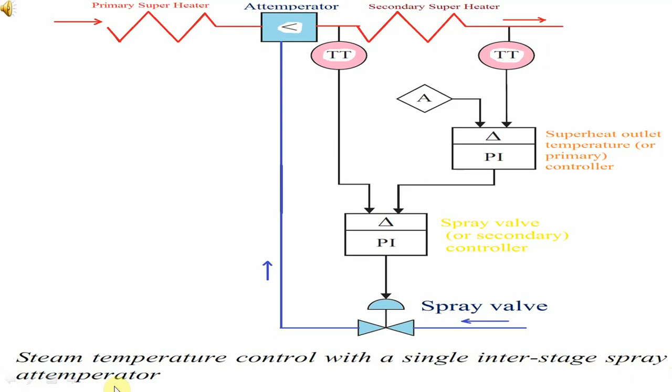TT stands for temperature transmitter. Since the temperature is measured in between the two stages of superheaters, the name of the control scheme is steam temperature control with a single inter-stage spray attemperator.

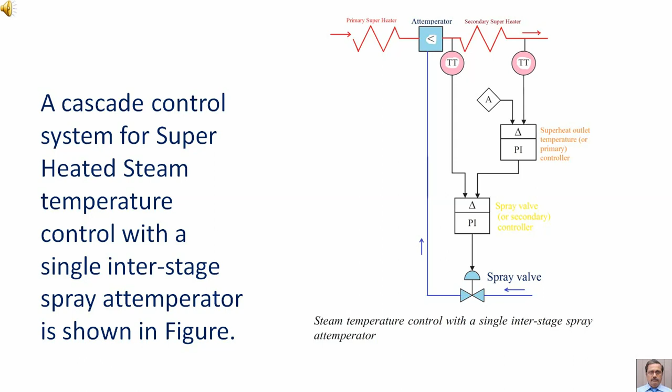A cascade control system for superheated steam temperature control with a single inter-stage spray attemperator is shown in the figure. Since the temperature of the steam leaving the secondary superheater is important, this parameter is measured and a corresponding signal is fed to a 2 or 3 term controller, proportional plus integral or proportional plus integral plus derivative.

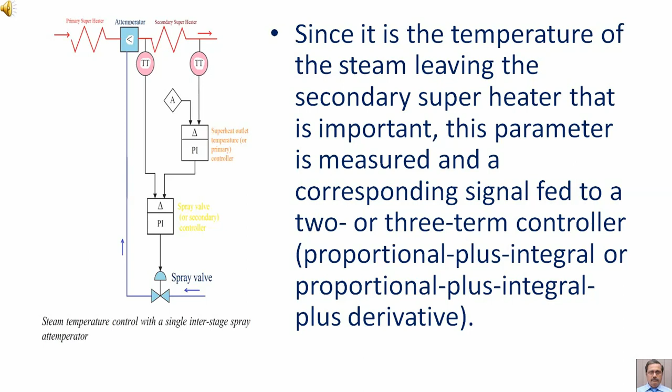In this controller, the measured value signal is compared with a fixed desired value signal, and the controller's output forms the desired value input for a secondary controller. Because the output from one controller cascades into the input of another, this type of control system is commonly termed cascade control.

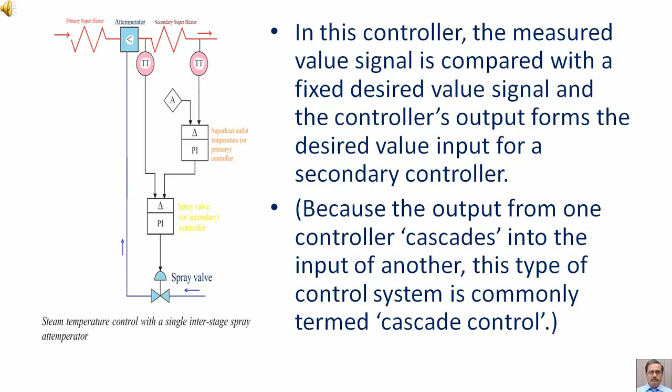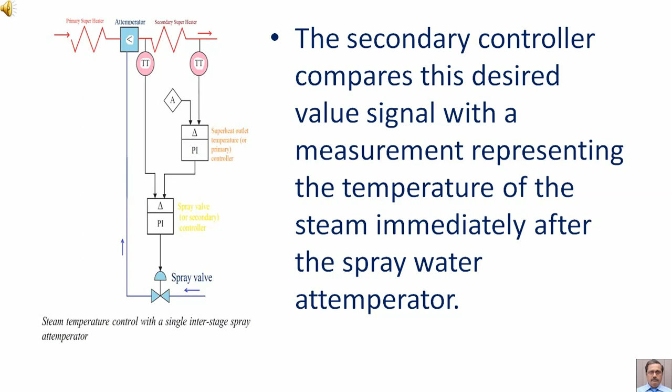The secondary controller compares this desired value signal with a measurement representing the temperature of the steam immediately after the spray water attemperator. The superheat outlet temperature or primary controller generates the set point of the spray valve or secondary controller as a function of the difference between the final superheater outlet temperature and the manually adjusted set point of the primary controller.

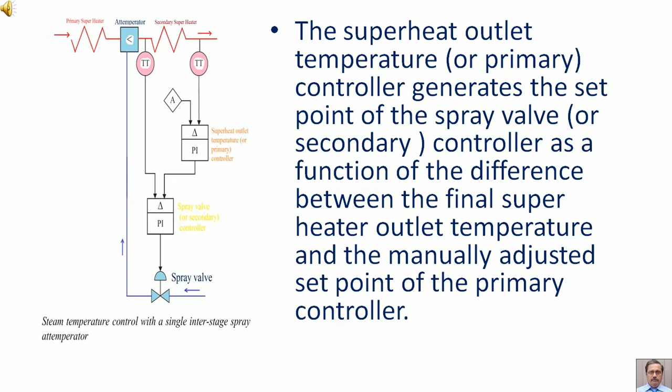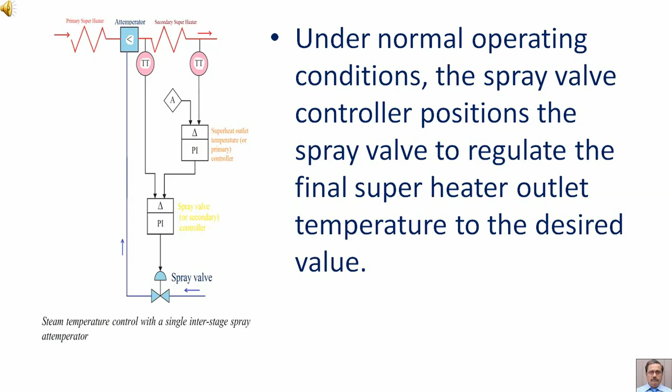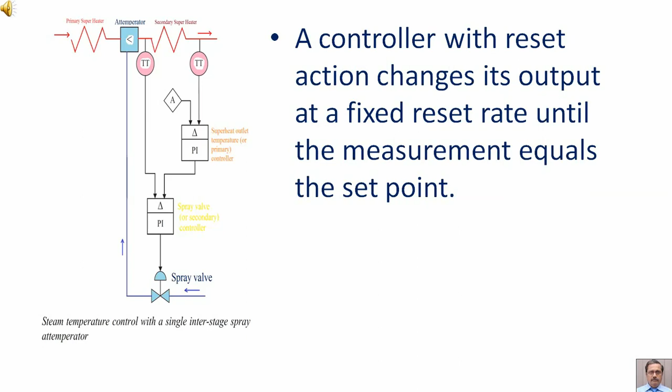Under normal operating conditions, the spray valve controller positions the spray valve to regulate the final superheater outlet temperature to the desired value. A controller with reset action changes its output at a fixed reset rate until the measurement equals the set point.

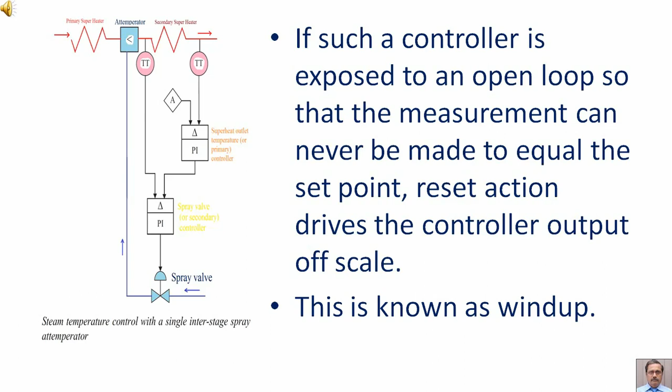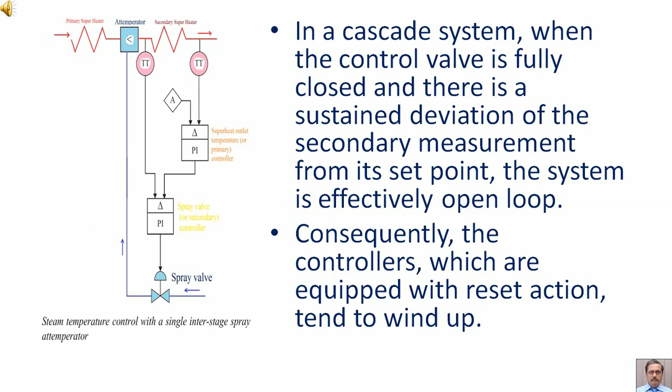If such a controller is exposed to an open loop so that the measurement can never be made to equal the set point, reset action drives the controller output off scale. This is known as windup. In a cascade system, when the control valve is fully closed and there is a sustained deviation of the secondary measurement from its set point, the system is effectively open loop. Consequently, the controllers which are equipped with reset action tend to wind up.

The solution to the reset windup problem is discussed in the lecture Superheated Steam Temperature Control Part 2, that is, controller saturation effects.